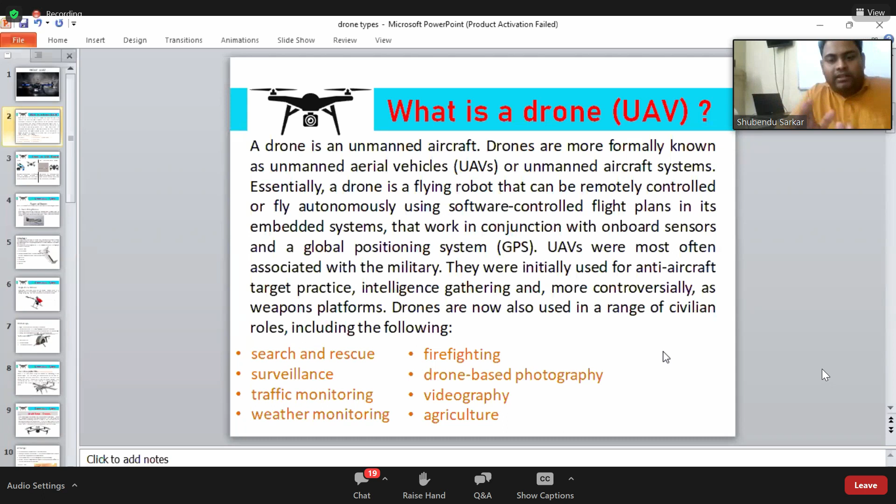Okay, so what I'm trying to say, let's consider how we can build the entire system of the drone. And before we start building, we have to understand how many types of drones are available, what kind of drone is used.

I think the voice is probably okay. I think the voice is audible. You are audible, okay. Thank you so much, everyone.

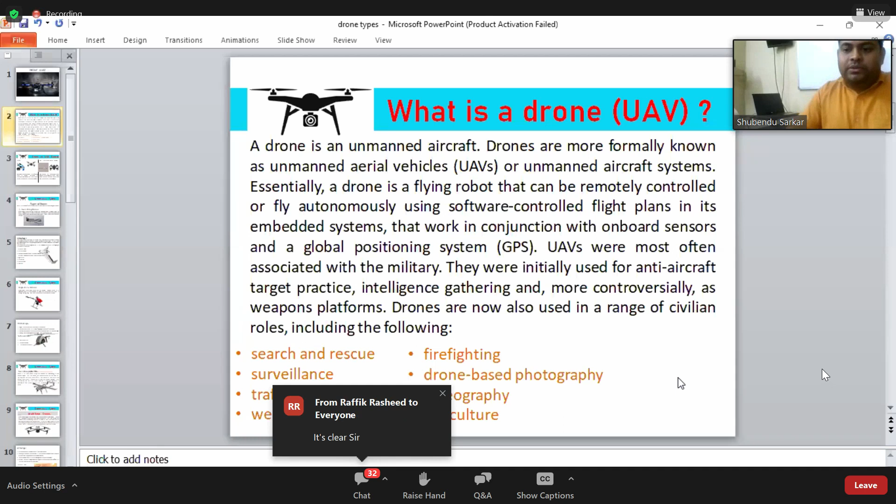Okay, so right now we are going to talk about the difference between UAV and a drone. That is the biggest misconception in every person, that they think every drone is a UAV, or all UAVs are drones. Okay, so let me clear this out first.

What is the difference between the drone and UAV? First of all, we have to understand what is a drone. Drone means, as I already told you, a vehicle that can be controlled by remote or controlled by intelligent software present in the machine. The person is not physically present over there. It could be a boat, it could be a flying object, or it could be a car also. So that is a drone.

But if I'm talking about UAV, it means the unmanned aerial vehicle. The name represents its aerial nature. Aerial means it has to fly. No boat comes into this, no cars, no tanks. Those vehicles which are able to fly will be considered as a UAV section. So we can say that all UAVs are drones, but we cannot say that all drones are UAV.

Okay, please explain again. Yes, definitely, I'm going to explain it again.

So if I'm talking about a drone, it means a vehicle that could be an aircraft, that could be a multi-rotor, it could be anything, or it could be a ship also, it could be a tank also. So if I'm talking about drone, there are multiple types of vehicles we are talking about: ship, aircraft, amphibian device. It means it is not necessary that the vehicle could fly. Remember one thing, it is not necessary that the vehicle could fly, we can still call it a drone.

But what about UAV? UAV has to be flying. That is the point, UAV has to fly.

So how can we represent the information? Most of the time we say this is drone, this is drone, this is drone. No, that is not correct, this is not the complete name. If you represent it properly, this is a drone UAV, or drone ship, this is a drone car, or this is a drone amphibian vehicle - you have to explain what kind of drone we are talking about right now, what vehicle we are talking about right now.

In this session, we are going to talk about drone UAVs, meaning the vehicle that can fly. We are using the word drone for unmanned vehicle. Why? There is a long concept behind it, why we are calling it like this. Let me give you a bit of history first, from where the word drone comes and why it represents this.

We are going to elaborate on that point later. Right now, the first thing to understand is that if we are talking about a drone, it could be any vehicle, so we have to be specific about what drone we are talking about. We are talking about drone UAVs, meaning unmanned aerial vehicle. That is the concept we have to understand first. A drone is not only a vehicle that can fly. Remember that point, everyone.

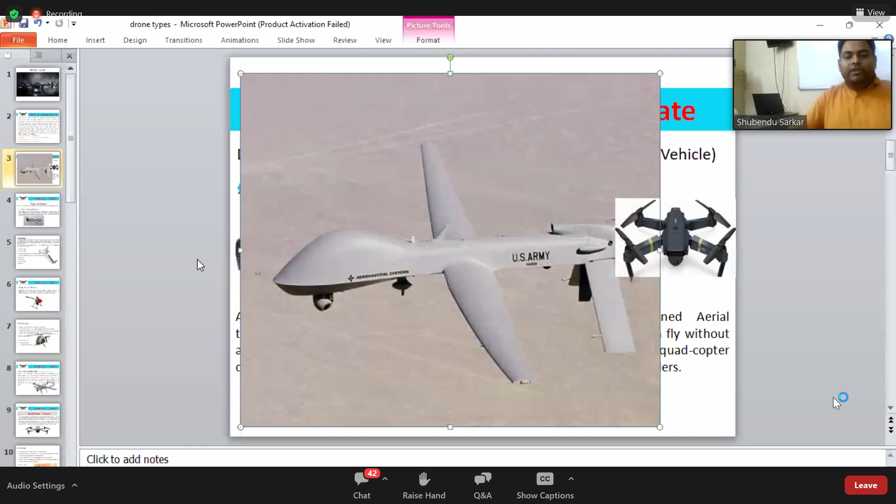So, I'm talking about this drone, if the image is visible to you. This is one of the most powerful drones America is using right now for surveillance and dropping short range missiles. They can deploy it over there. But the question is how they can do this.

Listen up first. In this drone, there is intelligence software also working for them. In most cases, they have satellite command and satellite communication with this drone. They directly communicate with microwave to this drone.

But the thing is, in some cases they need to cut off the connection, or in some cases the connection could get lost. So when the connection is not available, the commands are not available, there are some preloaded instructions present in the brain of that drone. The brain is very specific, very precise. Technically, in simple words, in layman's terms, we can say there is AI working in this drone.

So what's happening? They have the geo coordinates, they have the location, they have everything inside the drone. What happens at that time, when the drone is on its mission and the communication has been lost and the drone doesn't have any RTL command? Listen up very carefully - it doesn't have any RTL command. Now, what is RTL?

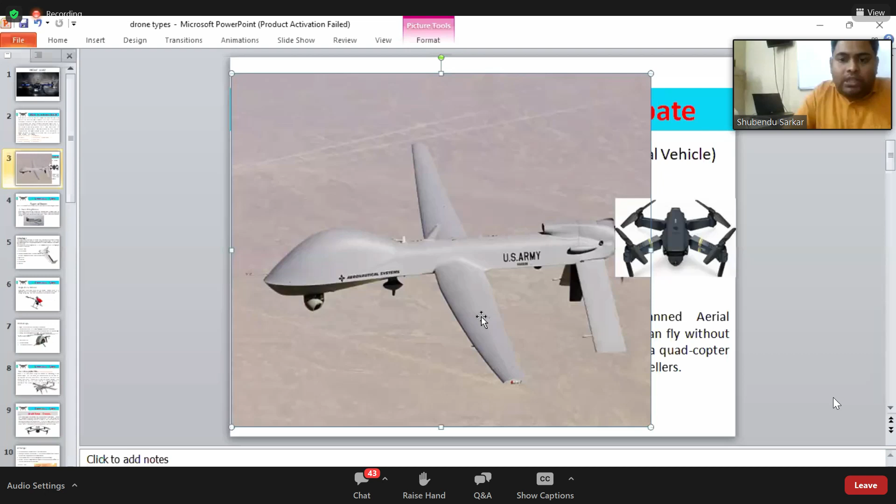Okay, that is the point I need to explain you. So right now we are moving forward to the next slide. We are going to talk about the different types of drones we have. Remember, this session is not only about theories. First, we are going to understand each and every aspect of the concept, what kind of drones we have, how they work, what principle is behind these things, what mechanisms and hardware they use to build these things. Then at the end of the session, we are going to build the hardware also. This is not only a theory session, this is a practical session also, so that each faculty member can develop their own drone or IoT setup and give the information to students, so that the students get something different and vast from there.

So right now we are going to talk about fixed wing drones. What is a fixed wing drone? First, we have to understand, everyone has seen airplanes, everyone knows about airplanes. In airplanes, the wings are fixed. There are jet engines, there are propellers, it doesn't matter, the wings are fixed. The point is, if I'm talking about a fixed wing drone, what are the benefits and disadvantages of a fixed wing drone? We have to understand first how the fixed wing drone flies.

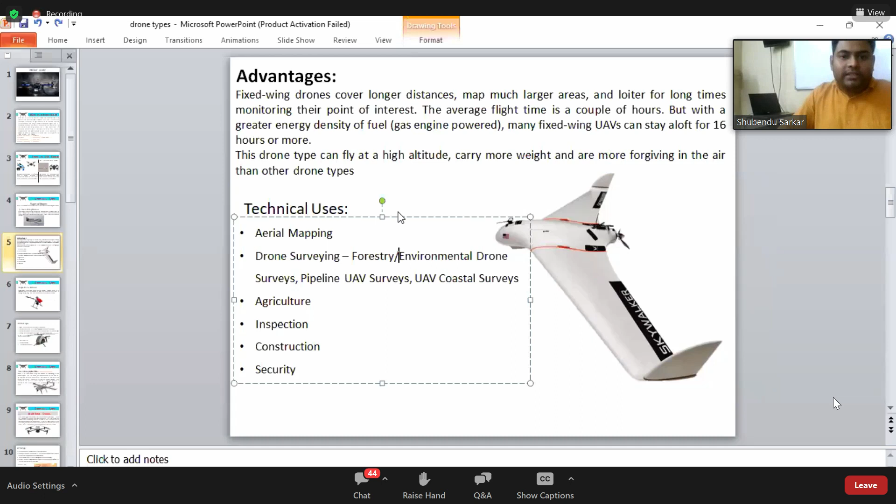For example, we have this drone right now. Now you see what's happening here. Just give me a second so that I can enlarge the image for you. There we go. So now we can see over here, there is only a single motor system put over there. So what's happening here? We are going to shoot the drone through a slingshot or some kind of shooting device, which gives a certain momentum to this drone. And after that, the primary motor thrust starts so that the drone can start flying in the forward direction.

One more thing - I used the word forward direction. This drone cannot put itself in reverse direction. It's going to move always in a forward direction. Either you need to take a U-turn or change the path, but you cannot get a reverse gear in this drone. That is one of the biggest drawbacks.

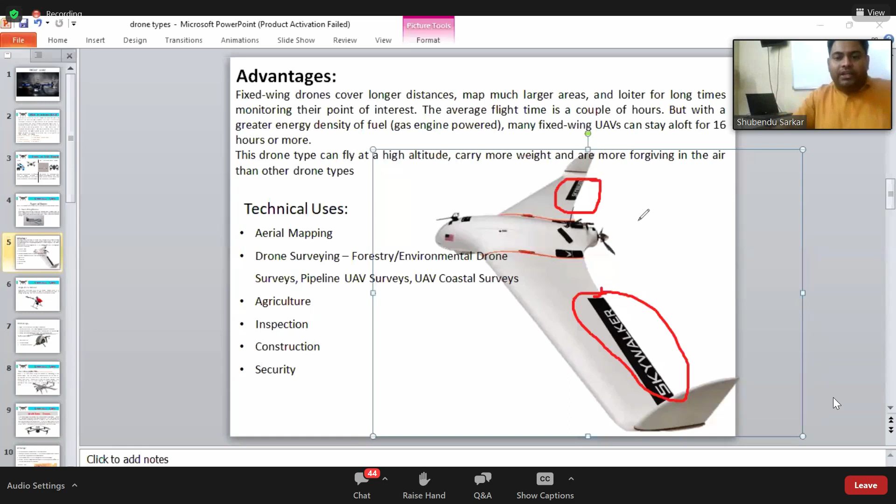In these wings over here, there is pitch control. Pitch control means there are rudders over there. So if you want to make turns, or make some kind of dive, the rudder will change the direction of that aircraft.

So technically, why are we using these drones? For agriculture purpose - if you want to spray something instantly over a large field, you can do this. For inspection - some kind of quick photography, but not drone photography, because that's a different thing requiring stability. This drone is not going to hold its position, it has to move constantly. Remember, this drone is unable to stay at a single position. It has to move, it has to create air drag, the thrust has to push the drone forward continuously, otherwise it's going to crash.

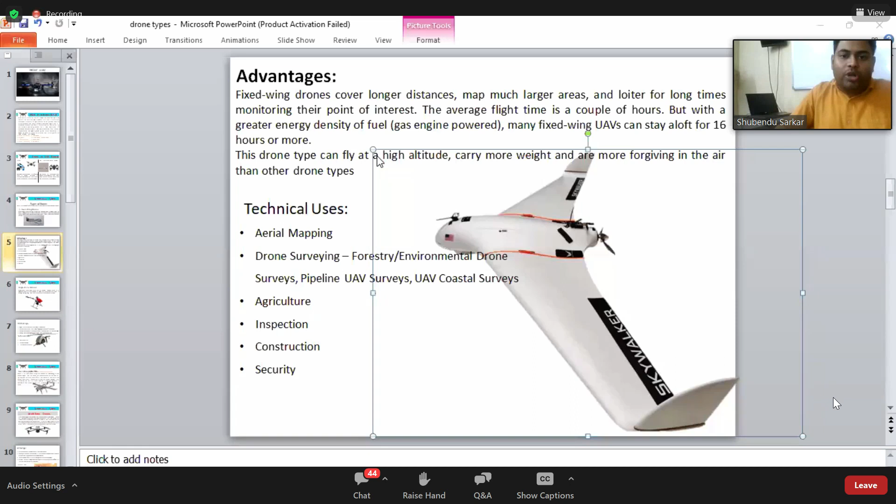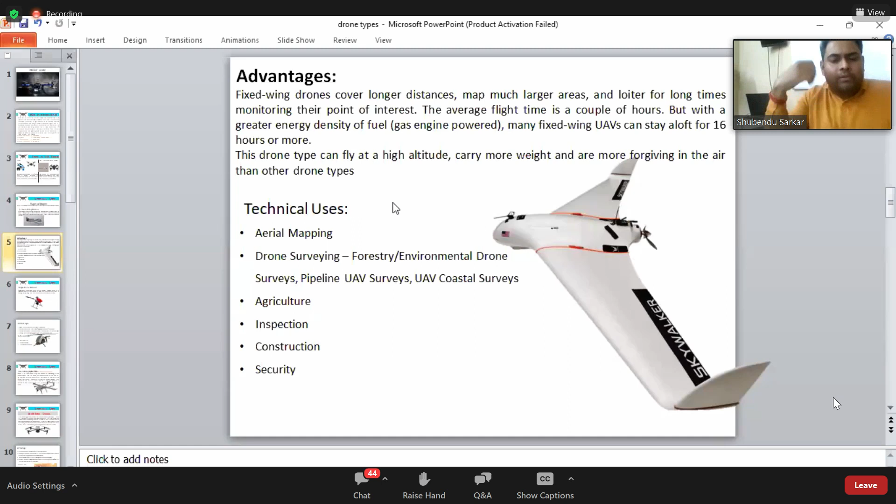One more thing, the drone is used for aerial mapping. Aerial mapping means if you want to make a terrain design, or know what kind of terrain is over there, you have a video camera and you fly the drone and it gets a quick recording for you - a recording of kilometer to kilometer area. And if you're having surveillance in coastal areas, seaside, deep sea space, you can use these things. One more benefit - it can fly at very high speed. This is one of the most high speed drones we can use, it can travel kilometers within minutes. That is one of the plus points of these drones, that we have to understand.

Let's switch to the next drone.

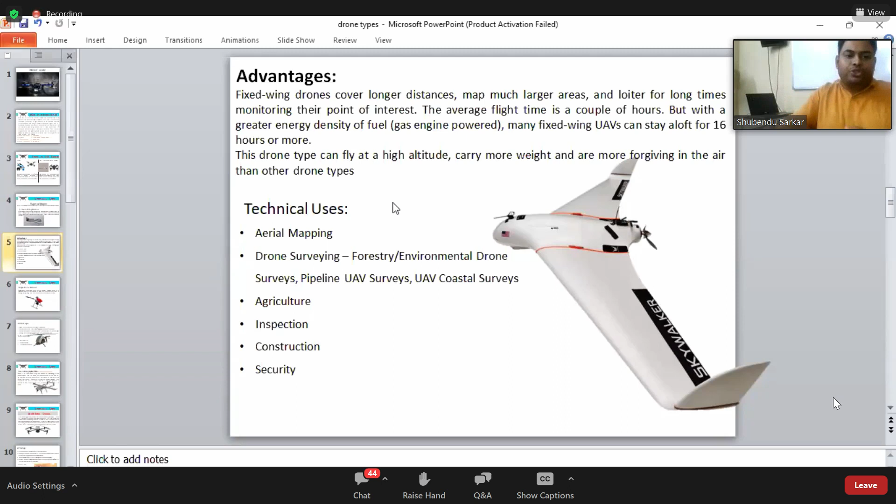That is known as single rotor drone. Everyone recognizes this - it's a helicopter. We know that this is a helicopter, but technically the real name of this device or vehicle is single rotor drone. First, let me explain - this is the most unstable drone, the most unstable vehicle, the most dangerous vehicle ever built. Yes, that is true. Why? Let me explain why it is most unstable.

First we have to understand how the single rotor drone works. In a single rotor drone, there are only these blades over there, and it is going to rotate like this. When it starts rotating, it is going to put out some thrust. So when it gives us thrust, we get a jump, a continuous jump. By the help of that jump, the single rotor drone is able to lift.

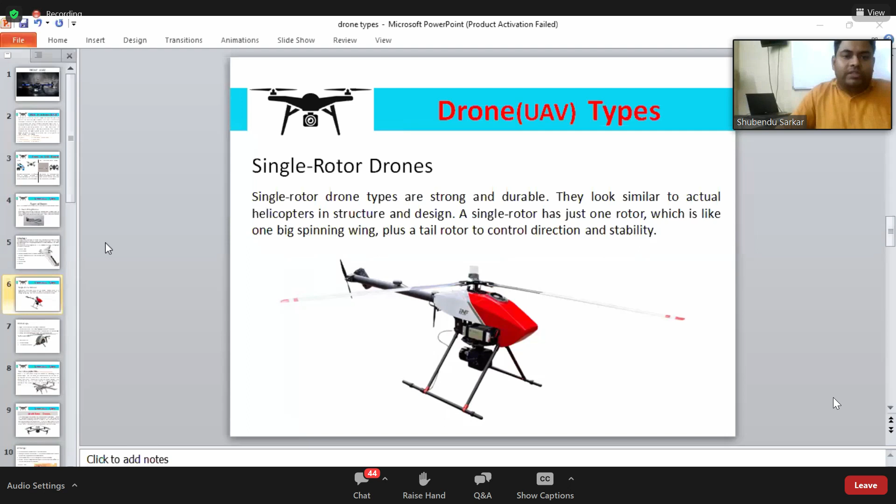Why do we use these drones? If I'm talking about the use of this drone, one is photography, aerial scanning, surveying. These are some of the very common uses of this drone. One more thing we use these drones for.

These drones can be built very tiny in size, if I'm talking about a drone that you can build on the size of your two thumbs. That's it. You can put this drone for surveillance, meaning for a person, or if you want wildlife surveillance, or defense surveillance, we can use these drones. That is one of the best options we can use there.

But again, I'm saying that is difficult to control. First point. Second, if we need to lift a heavy payload, of course we need to make the drone bigger in size. So while we make it bigger, it is very much possible the drone is going to hit someone, because due to the huge size of the propeller, if for any reason the drone becomes unstable, what happens at that time?

What happens at that time? Always remember, if you are traveling through a helicopter, remember one thing. When the helicopter starts landing, meaning the single rotor UAV system or helicopter system is going to start landing, what will happen? The process of landing has to be very slow. It is very necessary.

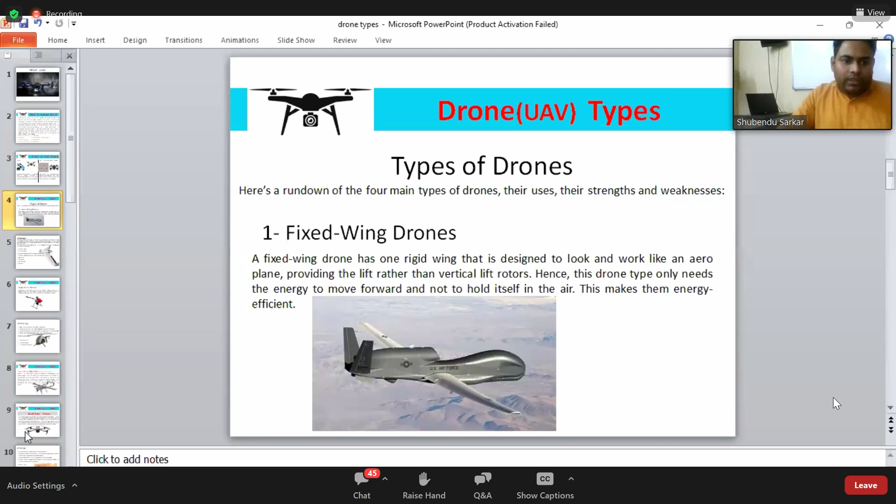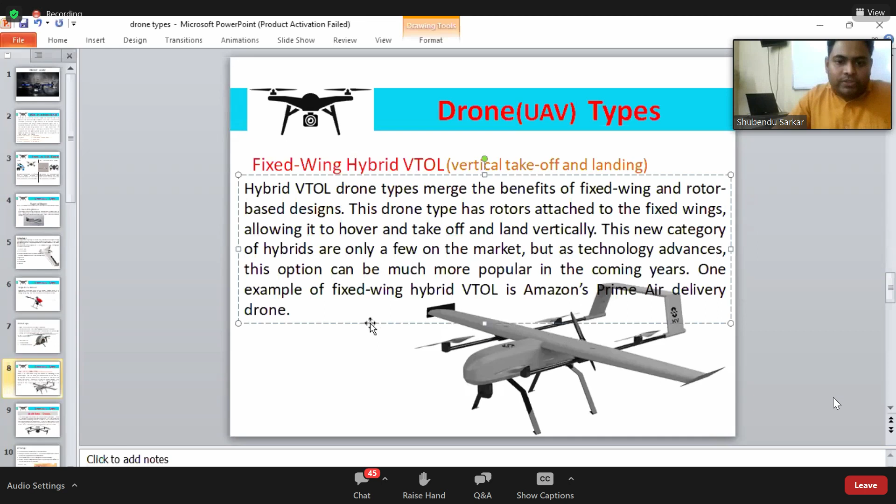To overcome that problem, we created the fixed wing hybrid VTOL drone. Now what is it? First of all, we have to understand who is putting in a lot of effort on this drone. Amazon is putting in a lot of effort and doing all the research on this drone, because Amazon wants this drone to deliver their packages and parcels. Now listen very carefully, what is the necessity of this drone and why are they building this type of drone? Let me delete the text so I can represent the entire concept of this drone first.

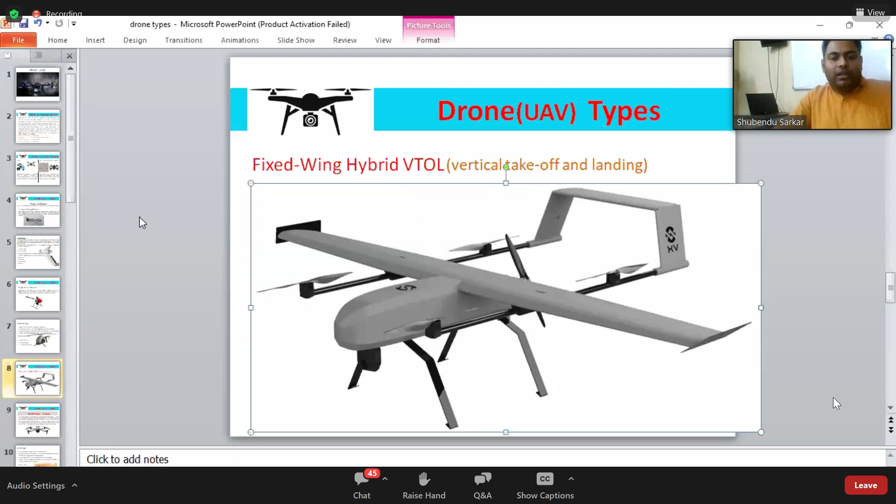So right now, let's see what we have here. We have to understand there are a few propellers: this one, and this one, and this one. Now, as you see, this is the propeller present in a traditional drone, which we'll talk about at the end because that is the showstopper, the widely used drone. Everyone has seen these drones, known as quadcopters. So this drone has four motors, and simultaneously it has one more propeller which gives it its horizontal speed.

Means first we have to understand how the drone works, let me explain. First of all, these motors help this drone achieve vertical lift, meaning all the drone puts thrust in the downward direction. All these four motors give us vertical lift. Is it clear? And then what's happening? This propeller system becomes active. What's happening with this motor, how does this motor work for us? We have to understand that concept.

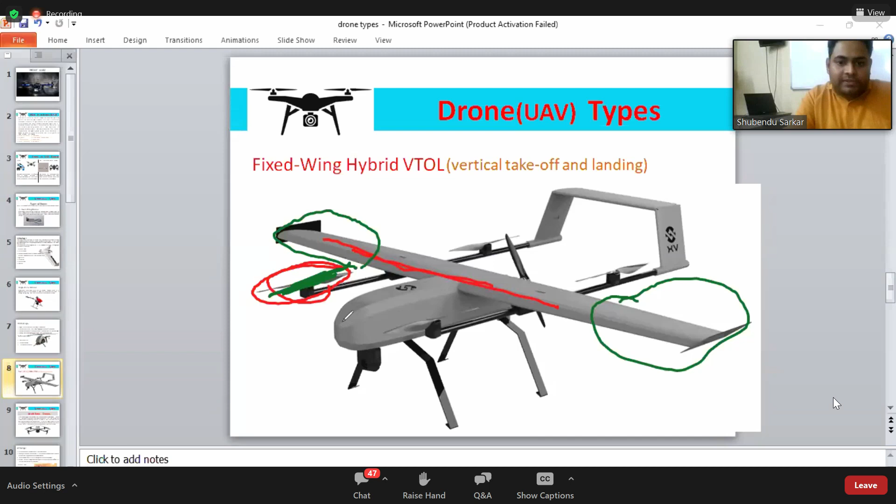That is why I'm saying this drone is under development right now. So what are the benefits? No runway is required, it can take off from a certain place. Second, it has both capabilities, meaning it can act like a fixed wing drone and it can act like a quadcopter also. And one more thing, it can deliver a heavy payload over a long distance. These are the benefits we are looking for, and the drawbacks and side effects I already discussed.

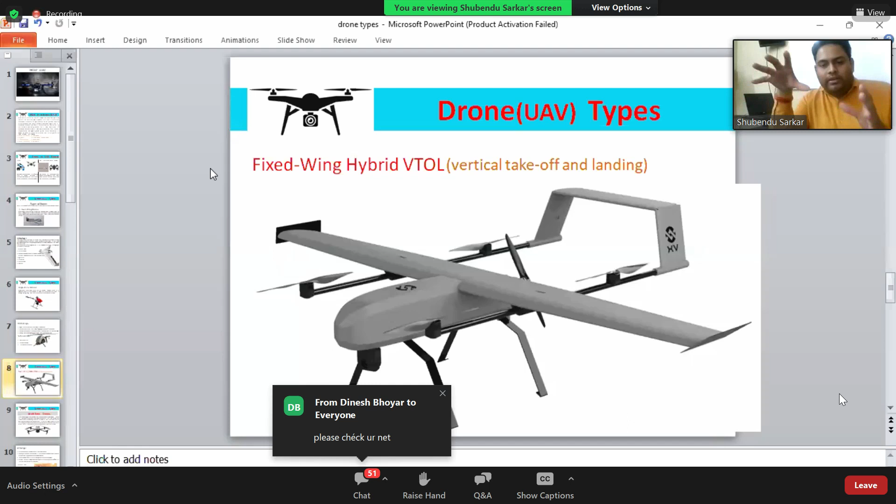Now we move forward to the final point - the drone which we want to build, the drone which is widely used, the drone which is one of the most era-changing devices we are talking about. That is known as the multi-rotor drone. Yes, this is the next generation of drone.

Now we are looking towards the future of the drone. From here we are going to start the topic, because those drones which I represented are part of the family of drones - it is very necessary that we understand about these things. But now we are going to talk about the vehicle that we are going to build for us. All right, let's begin with the multi-rotor concept. What is the multi-rotor concept and how does it work? We have to understand that entire thing in very detailed and precise points.

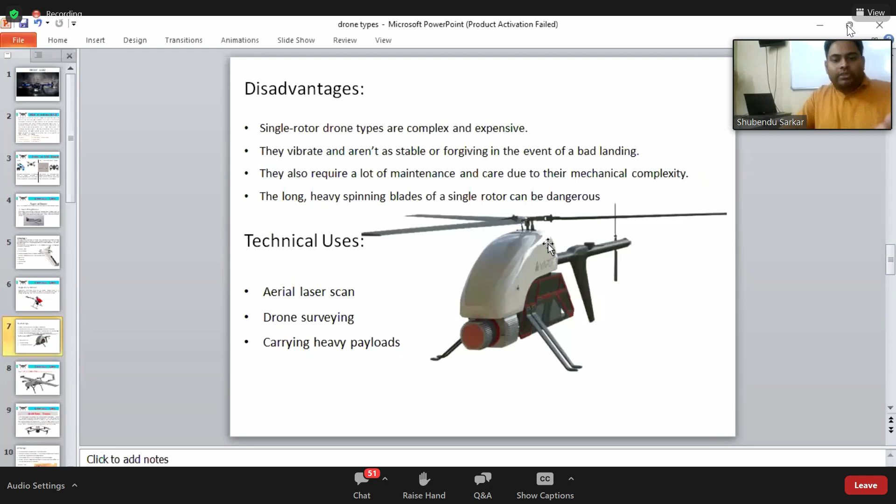So let me start with multi-rotor. Why is this known as multi-rotor? Because we already understand about the single rotor - this is single rotor, we already looked at the fixed wings. So right now we are using more than one motor to build this drone.

Right now everyone tries to say, sir, over here we saw there are four motors - is it possible that we can use even two motors? Yes, that is known as a bicopter. So now let me explain in very easy language how these machines are built and how we are going to build these things.

First of all, we have to understand that the concept of multi-rotor is one of the era-changing concepts, because right now we are going to talk about stability, position hold, RTL, surveillance, mapping, delivering items - it could be anything. So actually anything you can imagine can be done by multi-rotors. That is the point. But which multi-rotor we are going to use, that is the question.

So bicopter is going to help us, tricopter is going to help us. And why do we call it bicopter and tricopter, what is the point behind this? Let me explain one by one the entire concept of multi-rotors. So right now, why is it known as multi-rotor? Because, as I already told you, we are using multiple numbers of motors - these are multiple motors over there.

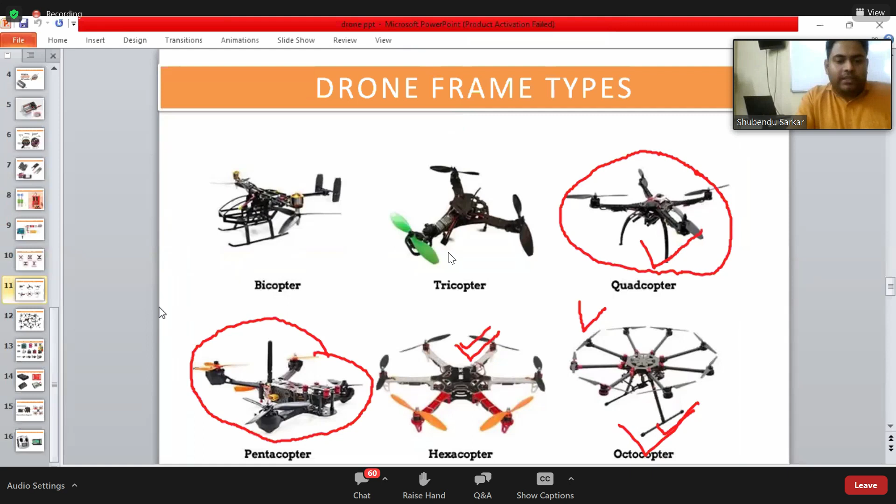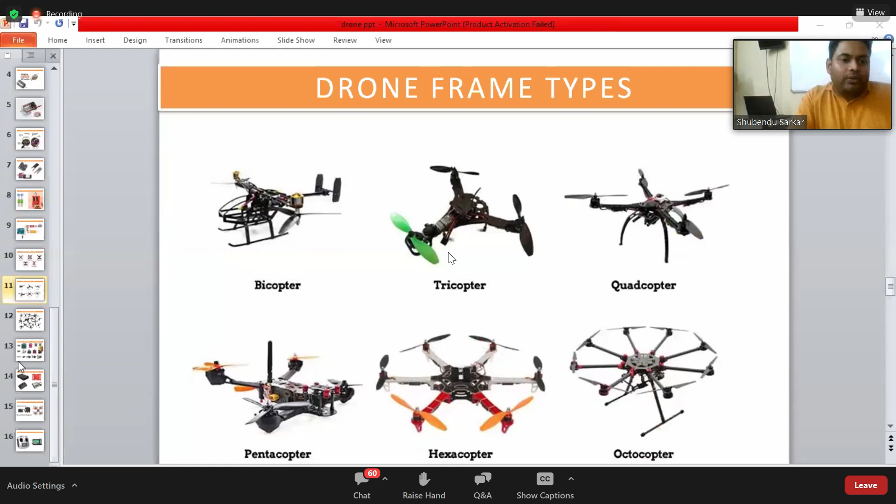And there it is. If I'm talking about what kind of microcontrollers and flight controllers we need to understand, these are the things we are going to learn in the next session. That is one of the most advanced circuitry we are going to talk about. This is not a regular NodeMCU or Arduino Uno we are talking about, these are flight controllers. They are very powerful CPUs having a vast clock processing speed. We are going to dive into a vast amount of information and knowledge right now.

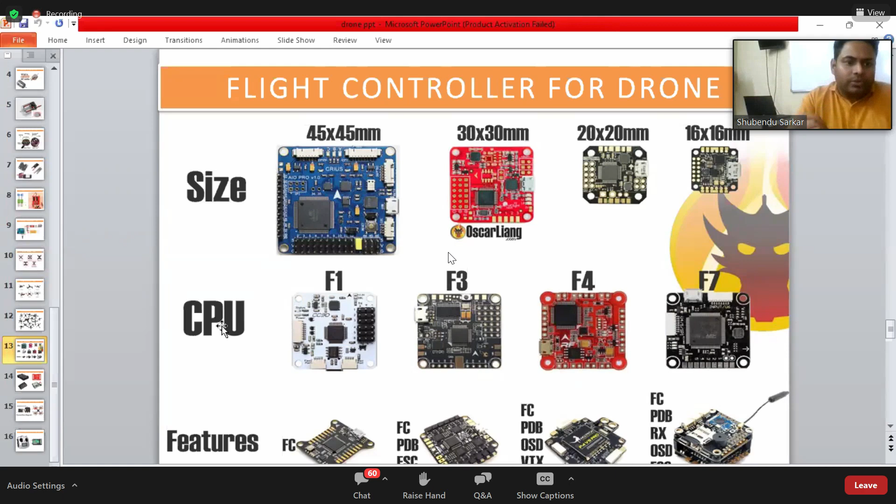So these are another flight controller that is easily available, that we can purchase from open websites. And this is the Pixhawk, one of the most powerful flight controllers that we can use, and the most reliable flight controller is Naza. We are going to understand each and every aspect of it, but right now we are going back to the point which we were discussing.

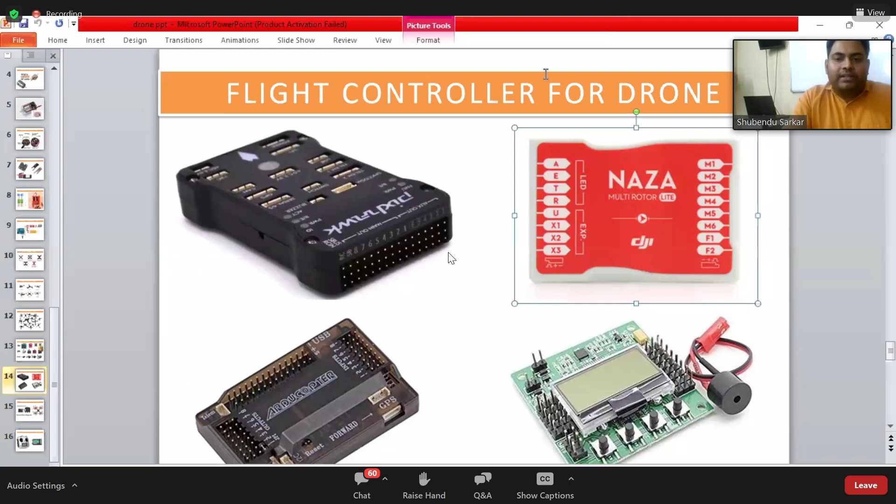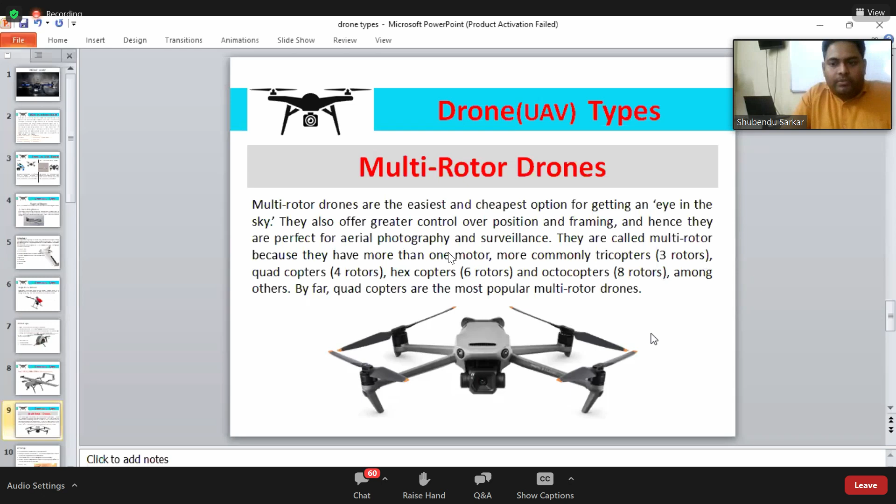So let's go back to the quadcopter. That was the concept of the multicopter, meaning we have multiple motors, multiple propellers, and we can do multiple things with it. So the question is, what are the advantages of it? How can we say this drone is better than any other drone?

First of all, this drone can hold its position very precisely with the help of GPS. Yes, these drones carry GPS with them. You can hold the drone in a pinpoint position with the help of GPS coordinates, it's not going to move. So while we can fix this drone in place, it means it is very much reliable for photography. That is the first point we have to understand.

Then the flying time of these drones is efficiently good, so that we can put some items and deliver them over a certain distance, that is also possible. Easy to control is one of the biggest things we have to understand. These drones are easy to control, they have their flight controller and flight software that assist and help you while flying. Second thing, if we build these types of drones, we can do multiple things like surveillance, delivery, photography, 3D scanning, inspection, as well as deploy items and deploy bombs. Meaning if the defense wants to use these things, they can deploy payload according to their requirement.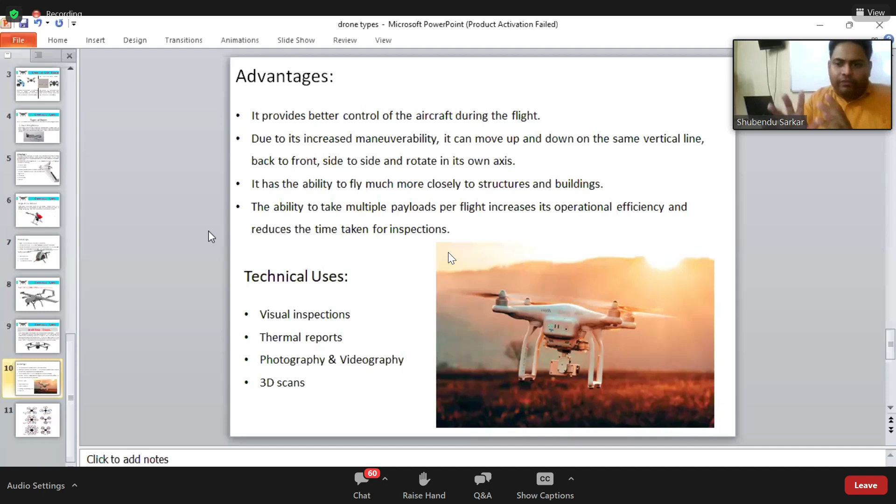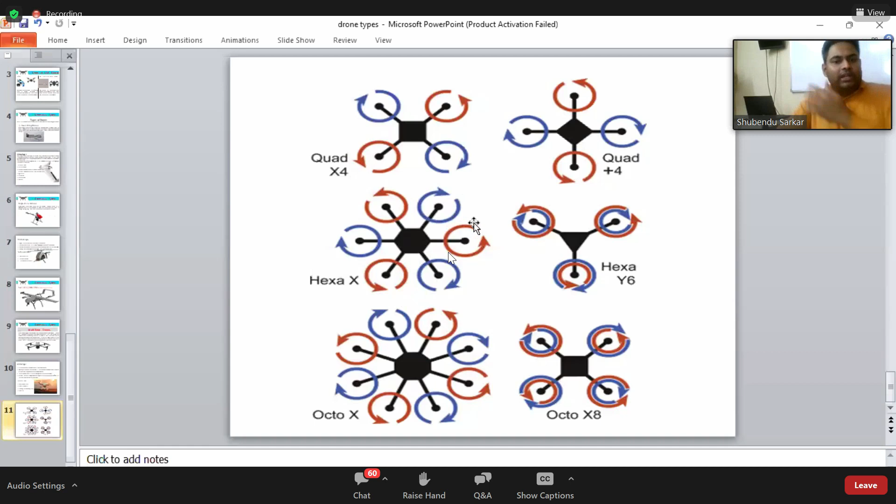Because we are going to cover all the aspects we need to understand about the drone to build it. Before I finish this session, I need to explain one more thing, that there are a few designs also available. Now you see there are some designs over there. These are the frame structures that I already showed you. But when we are going to put the program in the flight controller, in layman's words, if we are going to put instructions into the brain of the drone, we need to tell it what is the structure of that drone. That is very important, we need to tell the drone what its structure is. That is the most important thing.

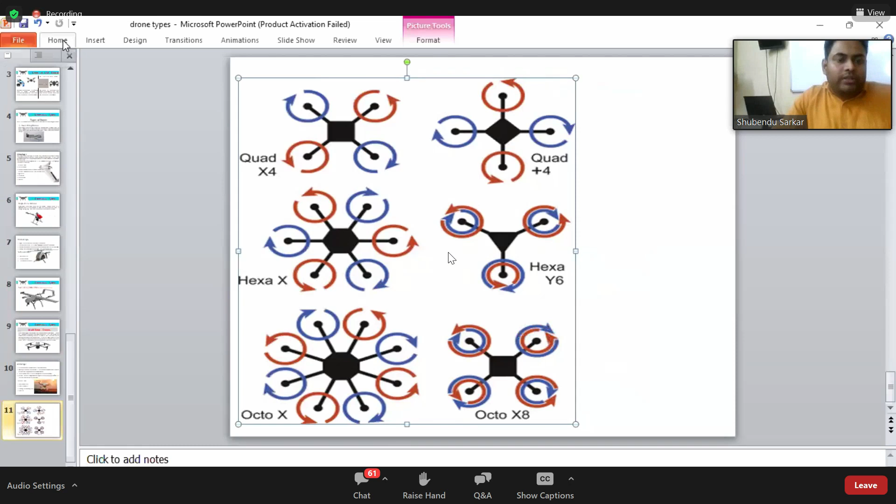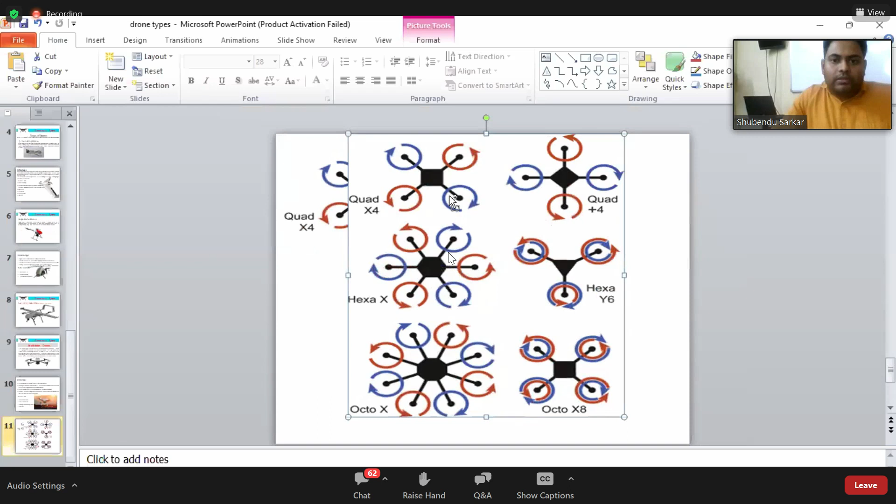So let me cover a few things for you and explain why there are some double circles representing over there. Just give me a second, because I need to clarify a few things for you so that you can understand the concept. Just give me a second, let me copy and paste this for you. And right now I am going for this drone, and similarly I am going to hit for this one. There we go.

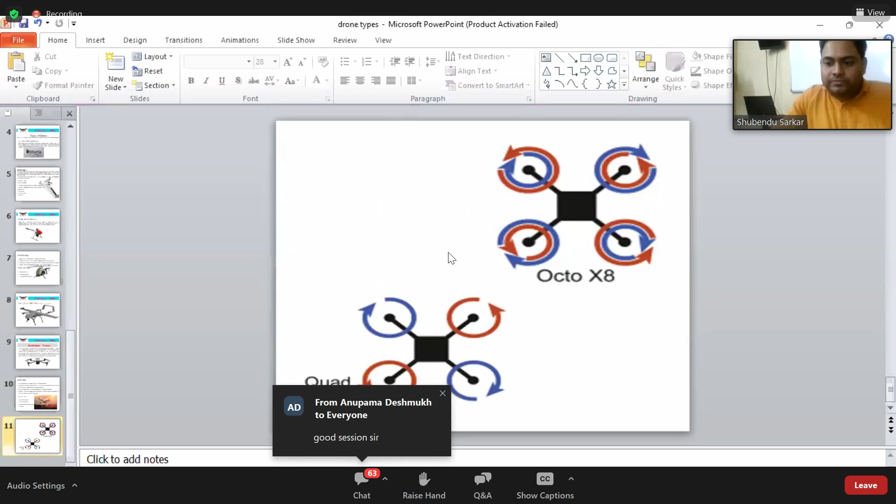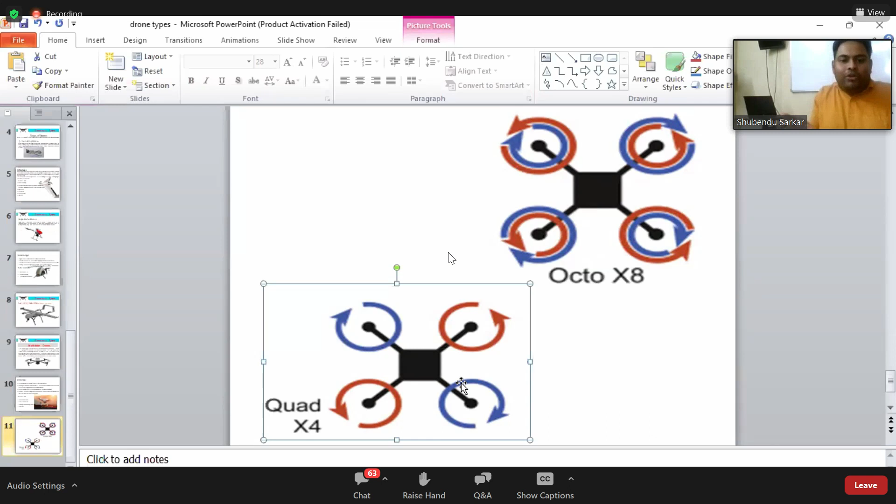Now we have to understand a very important point. What is the difference between these two drones? This one represents octo, this one represents quad, but it's having only 4 points of motors. What does this represent? Listen up very carefully.

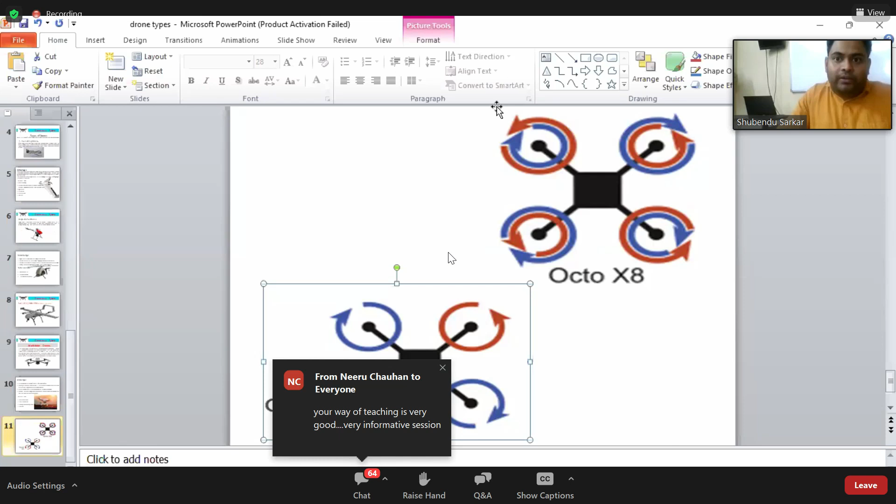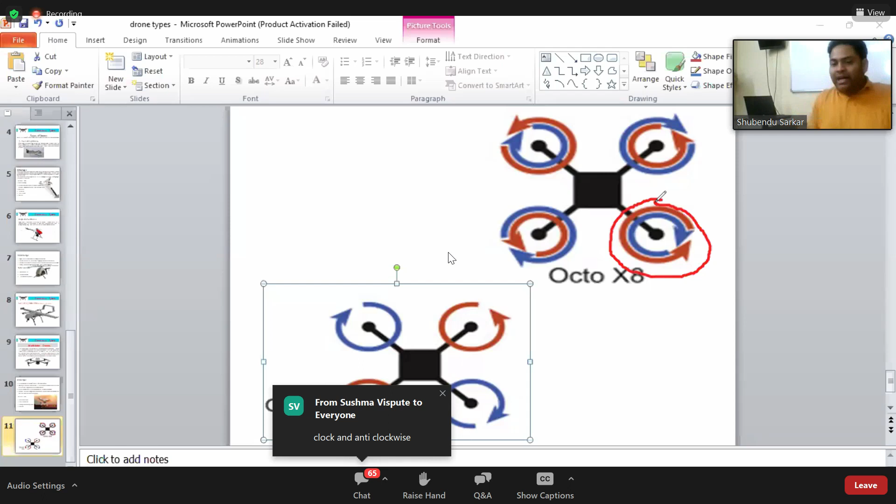If there are double circles, that means there are two motors upside down with each other, always remember that. There are two motors, one at the top of the drone, another at the bottom of the drone. Right now they both are cancelling each other's counter rotation. That is the point you have to understand.

In this scenario, there is only a single motor. One motor here, second motor over here, third motor is over here, and fourth motor is over here. That is why it is known as quadcopter X4.

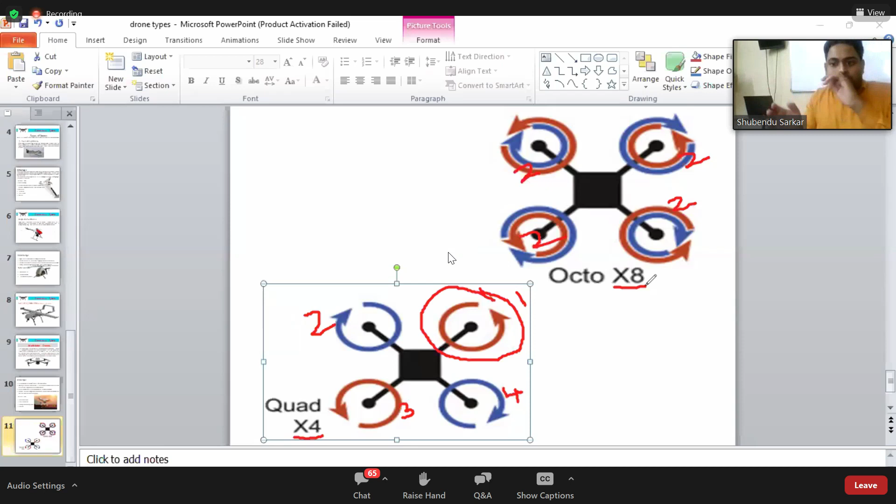But this one has two motors over here, two motors over here, two motors over here, and two motors over here. That is why it's representing octo X8. So technically it will be considered an octocopter. The structure of this drone looks like a quadcopter, but the functionality and power of this drone is going to match up with the octocopter.

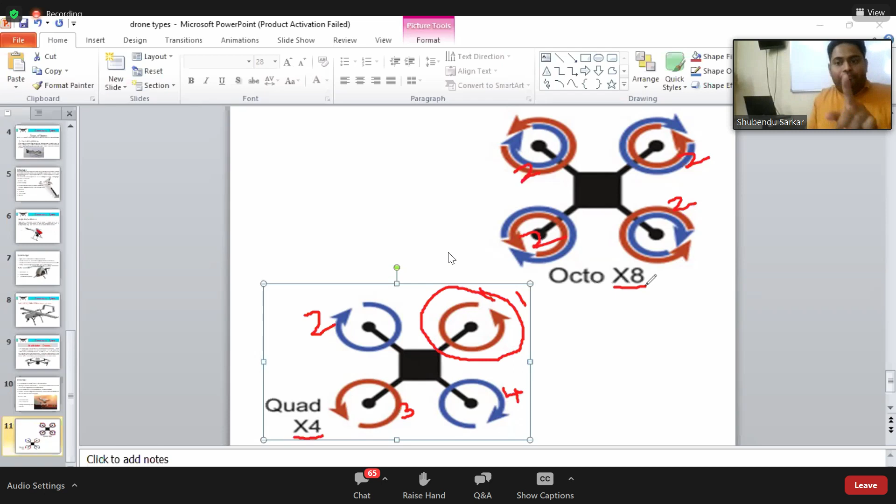At the very beginning of this slide, I put an image. Now see, everyone see this very carefully. At the top there is one propeller setup, one motor, one propeller, and at the bottom there is another propeller and setup system. That's what I'm trying to show you. What's happening? One motor means this one.

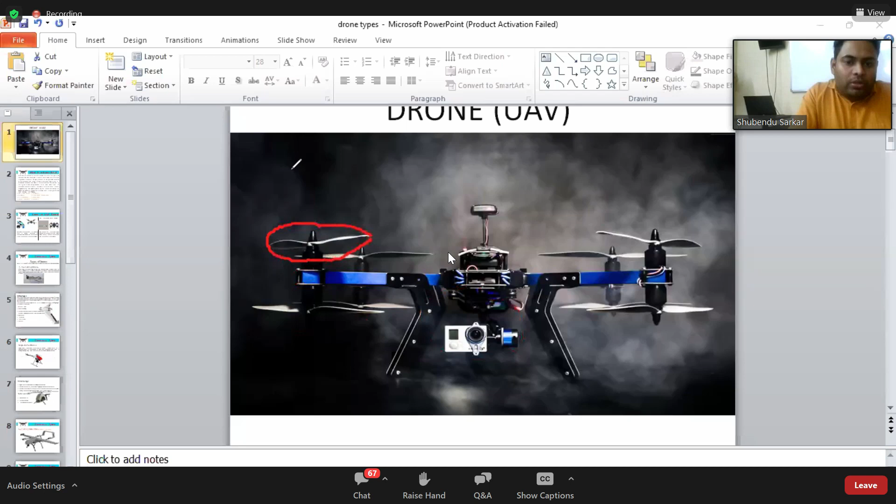This motor is going to put the thrust like this, and this motor is rotating in the opposite direction, and it is going to amplify the thrust and throw it towards the ground. So what's happening? We are going to get double thrust by this setup. That is the concept behind it, so that we can lift a huge amount of weight in a structure and frame of a quadcopter.

That is the concept behind this drone, and these are all the different types of drones we are going to talk about. From tomorrow onwards we are going to talk about all the hardware one by one, what components are involved to build these things, what accessories we can put for surveillance, how GPS is going to work, and most importantly how we can fabricate all the elements one by one with each other.

That is the point we have to cover from tomorrow's session. I already told you tomorrow's session is going to be one of the most important sessions and the point of drone making. So we are going to do some innovative things that we have to understand. All right, I think that's all for today. We understand the different types of drones, how they work, and what their necessity is, and now we are going to study how we can proceed with it. So thank you so much.